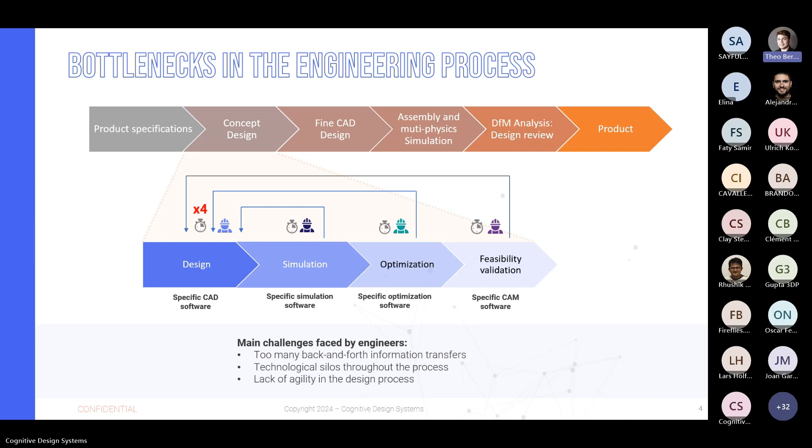This step encapsulates back-and-forth information transfer from design to feasibility validation that can significantly delay project timelines. This not only impacts budget, but also stifles the creative potential that drives engineering innovation. A lack of agility caused by siloed technologies can reduce efficiency and limit the impact of your design. And that's where Cognitive Design steps in.

This solution is tailored for engineers like you who want to accelerate design optimization and ensure that their designs are manufacturable. Here is how Cognitive Design achieves this through three core values. The first one, centralized manufacturing knowledge: access all relevant manufacturing expertise, unified and available from the start of the design process. Secondly, informed and accelerated workflows: your workflows are streamlined, keeping decision-making timely and in the loop. Finally, the third point, agility and flexibility: we empower an agile design process that supports optimization at every stage.

So you might be thinking, why should I use cognitive design? What's in it for me? Let's go over some of the key benefits, from design optimization to ensuring manufacturability.

First, let's talk about performance. The simulation-driven design application within cognitive design optimizes product design by integrating simulation data throughout the design process. The SDD app considers constraints such as the design space, functional region, and mechanical parameters like maximum stress and pressure. By analyzing these inputs, it redistributes material to strengthen critical areas while removing it from unconstrained areas, ensuring efficient use of material. This approach supports real-time adjustment based on performance insights, making the design process faster, more efficient, and focused on the performance to achieve.

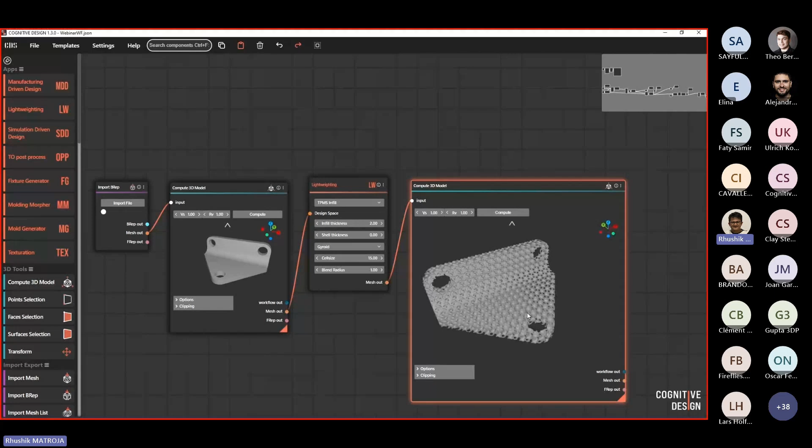And here you go, you have a part with the right cell size, with very complex structures, which is lightweighted in no time. Imagine doing this in a CAD environment — this could be a very time-consuming process.

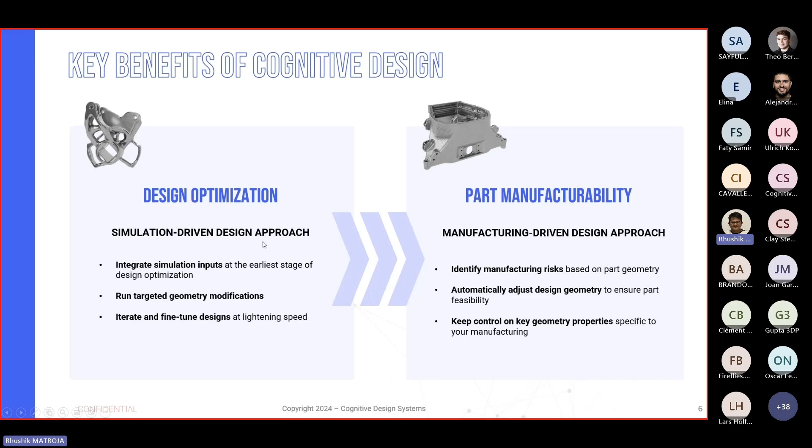Now let's go to our first case study. Our first case study is coming from the aerospace industry, where we will be looking at the door bracket of the Falcon 6X from Dassault Aviation. The main challenge here was to convert a raw topology optimization result into a more functional, manufacturable design that is ready for production. For that purpose, we went to convert this component automatically and autonomously.

Now imagine doing this in a CAD environment. You can have a lot of geometry operation troubles, you can lose topological features, and it can be a very time-consuming process overall.

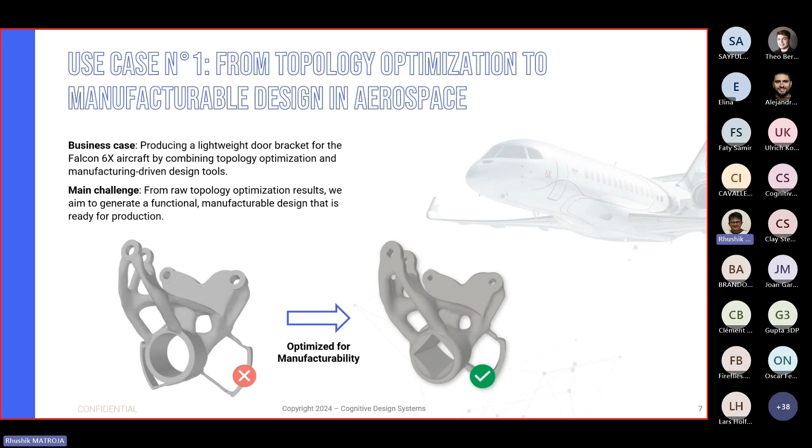And time is money. How about if this process of converting a concept into a manufacturable part is automated and accelerated? The whole workflow is divided into four different parts. First of all, we will reconstruct the topology. Then we will find the suitable orientation of the part. Based on that orientation, thirdly, we will optimize for manufacturability. And at the end, we will convert it back to CAD so we can bring it back into our conventional CAD environment to continue the work.

So first of all, I import the raw topology optimization result. You can see here, it's a good looking part, but it's very thin.

There are a lot of thin structures that are not easily manufacturable. I wanted to make it stiffer. For that, I imported also the design space.

The design space I imported as a step file, which are shown in orange. And on the step file, I chose the functional regions in green. These functional regions are the regions that I want to keep as it is and have a minimum thickness that I want to specify. I connect everything in a component called topology optimization post process, where I import the design space, the functional region surfaces, and the raw topology optimization result.

I want to make sure that the functional regions have at least 3 millimeter of wall thickness. The blend radius between the functional region and the remaining of the part is 1 millimeter to have a smooth transition. Then I have two different parameters to apply smoothing.

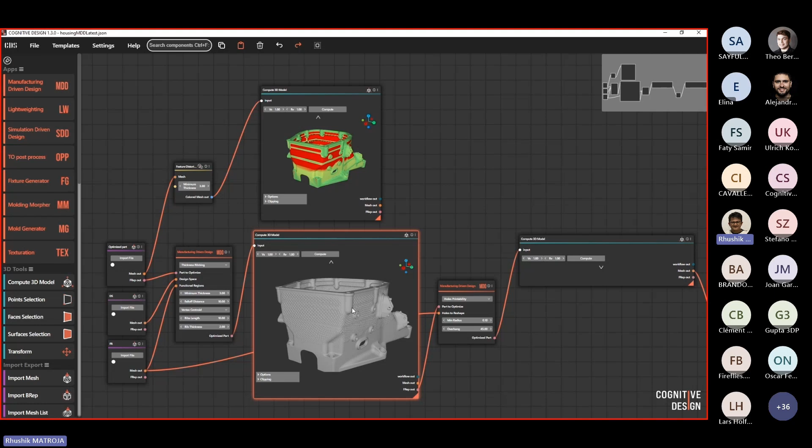So we used the thickness ribbing strategy in manufacturing-driven design, and it gave us a pretty good-looking part with ribs where it's required only, and this was done pretty fast and automatically. We can't imagine doing such an operation in a CAD environment, because of the complexity of the surfaces, but also because of the complexity of the geometry operations that it requires.

Once I had the ribs in place, I did a hole printability optimization, and I was able to convert those holes into diamond also pretty quickly. You can imagine that there are plenty of holes. There are a lot of holes everywhere in each direction. We wanted to make sure that only the holes which have the axis in the plane XY

are modified, and the holes which have axis in Z direction are kept as they are because they don't require any supports there. So these holes are left as they are, and the holes on the side were changed to make it manufacturable without support. Once the modification is done, I went through another feature detection analysis, and the part was looking pretty good. And this is something that I can export pretty easily.

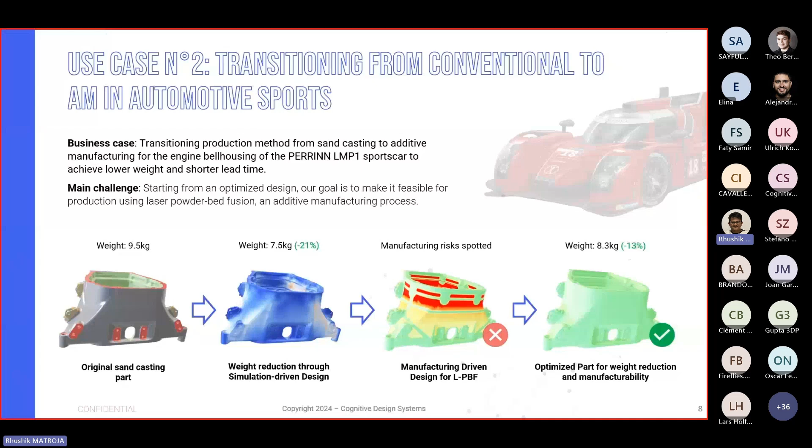Now I'm going back to the slides and go to the conclusion of the presentation. We went through two different use cases, one from aerospace industry and another from automotive sports industry, where we were able to do the reconstruction of topology optimization result to make the part manufacturable based on identifying the manufacturing risk and applying the modification. It's a perfect example of informed design decisions. Secondly, we were able to convert those geometries into CAD, so we can reuse them in a conventional CAD environment.

We were able also, in the second use case, in the bell housing, to incorporate simulation-driven design, where we modified the design of the part using stress as our information, and once again doing informed design decisions to alleviate the weight. We also did iterations to fine-tune the design at very high speed, and everything was done semi-autonomously, which allowed us to gain time in the whole design cycle.